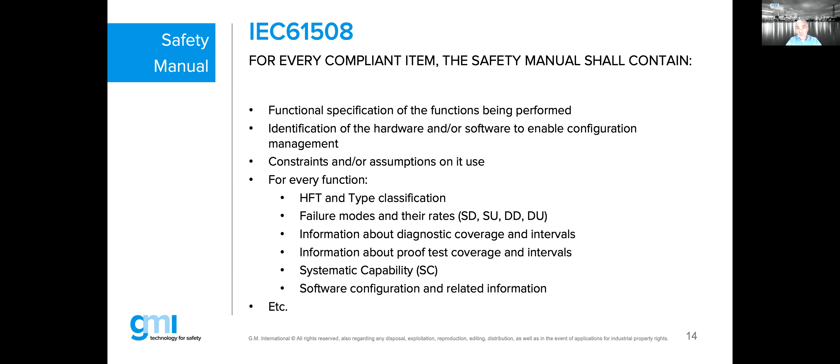Information about diagnostic coverage and the intervals, information about the proof test coverage and intervals, because every manufacturer has a certain reliability that comes out of their reliability calculation on the product, and they may tell you how frequently you have to test the system to a position that you know that the safety function is still working. Also items in there like systematic capability. Again, that's the quality of your design of your products, and the software configuration and the related information.

And to go specific now on one topic called the software compliant devices, or let's say the software firmware inside the subsystem, there's something very specific on the safety manual, because the safety manual in Annex D in part 3 of the 61508 is talking about the safety function integrity. That means the integrity of the safety function itself that is achieved by firmware functionality or software functionality. That means the functions, the constraints, and the evidence for every single element shall be precisely and completely described.

And I wonder how many of you have seen this in reality, that the safety manual of such a device is giving you specific information on what to take care of. That means things like the attributes of an element. You can have an element compliant device inside your subsystem; it shall be defined what the integrator shall consider during the application of hardware and/or software combined safety functions.

What I'm trying to say here is, there are some specific limitations and instructions coming in that type of section. You as an end user, when you're combining two instruments together, it doesn't necessarily mean when you buy two SIL 2 elements, let's say, that all of a sudden you can claim a higher SIL with that. That means you need to look for specific information towards the compliance of software related functions. Can I go into a higher SIL? Yes or no? Items like configuration, revisions, and backward compatibilities.

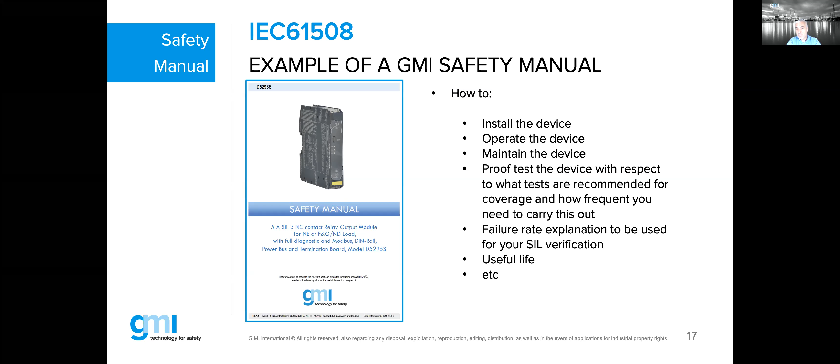But you may have a mechanical product in the field, depends on the amount of strokes of your valve, etc. So the useful life is very important to keep a record of, because you have the mission time on your loops versus your useful life. And I think I've got somewhere a slide where I give you some more information on that. I thought it was in here, but it's probably coming later.

So normative requirement, and I'm jumping now to another safety standard, which is called the IEC 61511, which is the application-specific standard for the process industry. And the process industry, I think I've got a slide with some more data. What is the process industry now including? Now, what is now normative required by the IEC 61511?

And for those who have read the IEC 61511, will see that in the definition of the abbreviation, which is in section 3 of the 61511 part 1, they call it functional safety manual next to safety manual. And there are unfortunately too many engineers still today in the year 2020, and the standard is out in Europe since 2016, in the US since 2018, that have no idea what a functional safety manual means, because this is not the same as the individual safety manual from the manufacturer. You may need the individual safety manual from the manufacturer, obviously, to get all your data together, but we are talking here about the functional safety manual of your safety instrumented system.

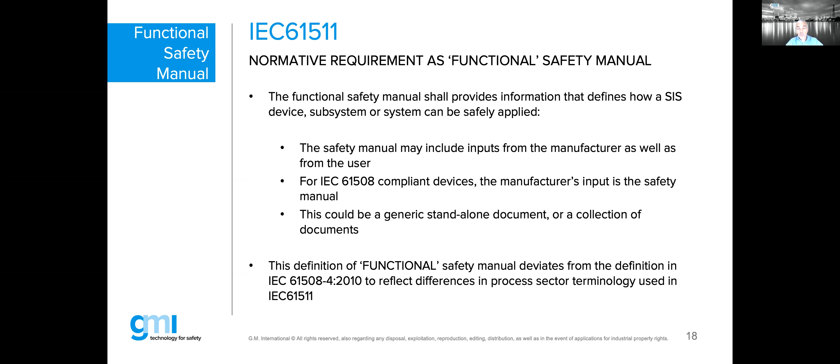So the safety manuals individually of subsystems will be an input coming from the manufacturers. For every compliant device, as I told you, normative required since 2010, you shall have a safety manual. And your functional safety manual from your 61511 could be a generic standalone document, which in reality it almost never is. It's a combination of all kinds of documentation. And my advice will be later on, the more documents you will have, the worse you will be able to keep a clear track and record of revision, etc. So in the ideal world, you have only one safety manual per safety instrumented system, but in reality, I'm afraid that's also not really achievable.

The word functional is trying to deviate from a definition from the 61508. So the 61511 talks about functional safety manual, whereas the 61508 talks about safety manual. So they skip that word functional. And the functional safety manual purpose, as I already told you, is a description customized per the way you have configured, the way you have designed your system. But the aim is to help, at the end of the day, the field engineer, the maintenance engineer, the operator engineer, or the end user to ensure that the systematic safety integrity will be maintained throughout the useful life and the mission time of that specific safety integrity level for that specific safety function. And the safety function, we still call this here, the second bullet, your safety instrumented function.

So in fact, it will be a customized document that the manufacturer of the components cannot make. It has to be made by the engineer or the department, or let's say the system integrator or the system manufacturer who combines those items together.

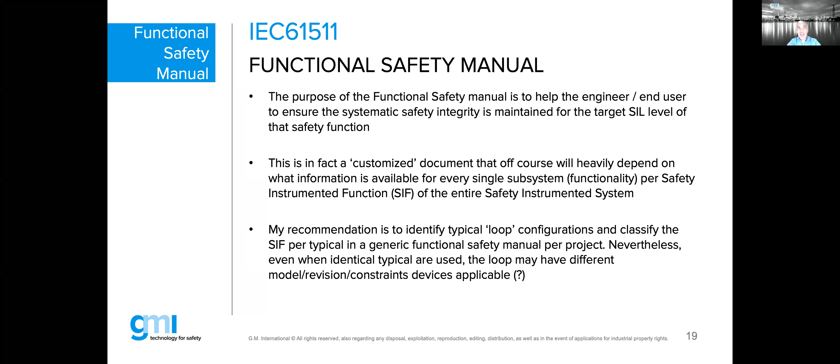I have done a functional safety manual for a project which was dedicated to an end user, and the end user had a specific unit where they had 1 out of 1 loops, 1 out of 2 loops, 2 out of 3 loops. So we described templates, typicals per type of loop. And then we made a matrix where, specific per loop, we have additional information, because every single loop can have different proof test intervals and safety data, because we have used maybe different material.

So we don't want to reinvent the same wheel every time for a 1 out of 2 loop. We made one dedicated, very detailed 1 out of 2 functional safety manual with a matrix linked to all specific safety loops. That is how we solved that for this one client.

I think we have lost you for the last 20 seconds. Okay. I just got a message that my connection was unstable. Am I back now? Yes. Now you're back. I look very pale in my face. It is because of all this lighting, and it's getting dark outside. So now all of a sudden, I look like I've got a white face. Well, I'm not as white as the picture looks. Anyway, I'm glad I'm back, and thank you, Mauro, for saying that.

So, coming back to this slide, I think I just opened that slide when maybe the connection was dropped. In the example of a SIF, you may have 55 different safety loops, and all the 55 different safety loops will go through the same heart of the system, which is the safety PLC. And through all those interposing relays from GMI, you may have used all the same type of GMI interposing relays. However, at the end, you may use 2 or 3 or 4 different vendor solutions

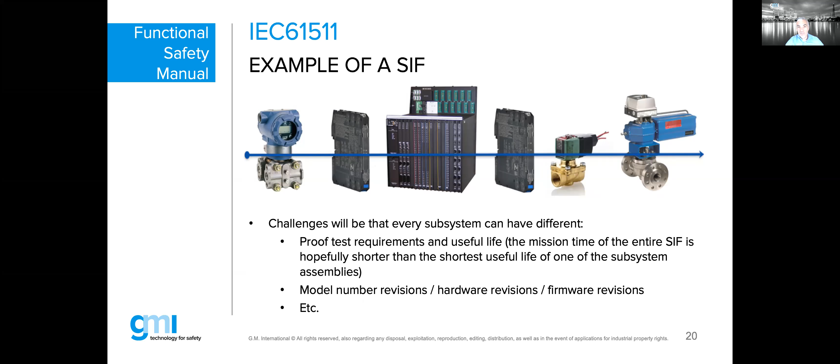So what we say here is that the mission time of the entire safety instrumented function needs to be, and hopefully this is correct, shorter than the shortest useful life of one of your subsystems or your assemblies in your safety loop. For every single safety loop, we also need to see the specific model revision number, and if applicable, the firmware revision number; that needs to be captured per subsystem in one safety instrumented function.

The purpose now of such content, and although I was trying to be brief, let me just go back. Although I was trying to be brief, it's still a lot of bullets, a lot of text, but I will try to capture this in a practical example. If you think about it, a functional safety manual for one of those safety instrumented functions will have to give a description. What is the purpose? What is the description of the functionality being performed, including all the details like the revisions of hardware and or software.

I am an instrument engineer myself, from the very early days, in the 80s. What we would usually go by would be a schematic. The safety manual would also be like a schematic together with a P&ID. We would actually have enough with that type of information to understand how the loop is working. However, we have to think about the future, that people who are taking that type of information may not be as skilled anymore as we used to be in the older days.

I don't think the people are more skilled today. And even looking at the picture, or the schematic, they may have a different opinion on what is actually the functionality. So those are items that need to be avoided, because the whole purpose of functional safety is to minimize human failure. So the better and the more detailed we can describe it, the better in the future, so that hopefully people will not make a human interpretation with a human mistake on the particular functionality.

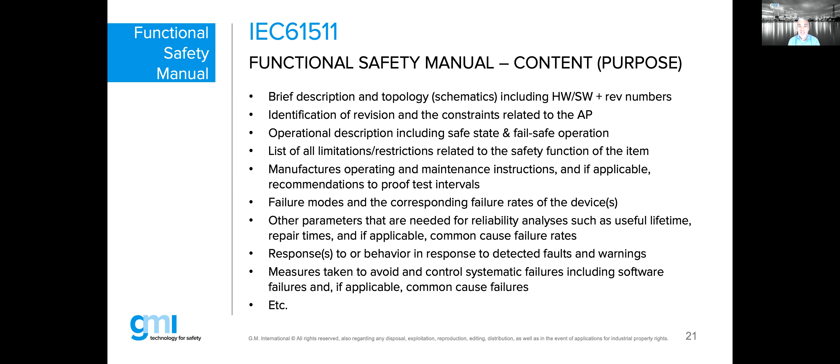Failure modes and the failure rates, because that will be needed by the person who will do the calculation. The response behavior in terms of when you are detecting some faults; some vendors will give you some time to go and repair it, depending on the redundancies, the configuration, etc. I will not go through all these bullets because I could probably spend an hour on here. I will jump to the poll question and Mauro will launch the second poll question.

Yes, I'm going to launch the second out of 3 poll questions. We will have a last one later on. Right. Okay. Can you see that? Yes, I can see that. In the meantime, I saw a question coming in. I was distracted with the question. Let's stay on the poll.

A project needs to comply with the IEC 61511 standard and is using only IEC 61508 compliant devices. That sounds like a very luxurious position, if that would be possible. So then the question is: answer A, you need a safety manual per device. B, you need a functional safety manual on your SIF level. Answer C is both A and B, and answer D is none of the above. So we were creative with none of the above again.

Maybe when you click these answers, you sometimes click too quickly, but when you read it again, the question is clearly saying you have a project that needs to comply with the 61511. So the first part of the sentence already immediately triggers my mind, because this poll question was made probably like 6, 7, 8 months ago. I don't even remember it myself, but when I read it now, it's clear. Well, the poll is finished, I think, Mauro, because I see that the majority already gave the answer.

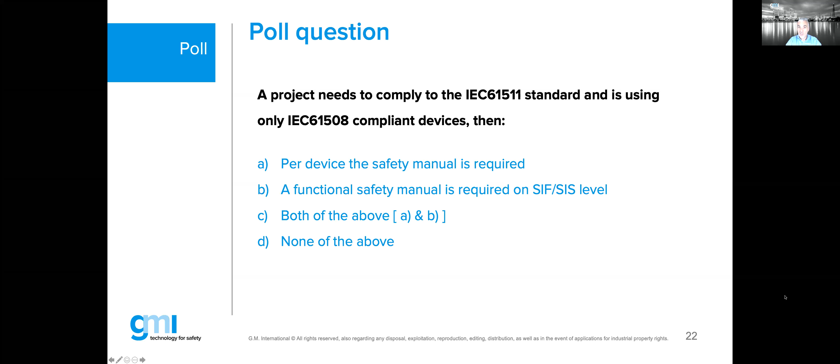Anyway, to finish my answer to this machinery directive or standard, I'm pretty sure that towards the machinery, there is a similar approach on the safety description and towards a safety manual. I'm pretty sure, but to be 100% sure, I should check the standard, which I cannot do now because I'm here in the webinar. So excuse me that I cannot give you a 100% answer on the machinery section, since this is not really my experience. Okay, Mauro, let me continue.

Well, the continuation is a summary. We have one more slide, and then we will go to the Q&A, looking at my clock. Okay. What can you take away from this 20-30 minutes talk on safety manual versus functional safety manual? Well, the content, although it is more or less the same, the functional safety manual can only be made by the people who are building, designing, configuring subsystems together.

You can never expect that a manufacturer, like for instance GMI, which is providing you with the barriers, the isolators, the power supplies, interposer relays, etc., can provide you with a safety manual for maybe your solenoid in the field you are using. And the solenoid manufacturer can never give you the safety manual for the interposer relay or the barrier that maybe GMI needs to give you.

So what I'm trying to explain to you, very simply, is think about when you are configuring and when you are combining all those system functionalities. The safety functionality needs to be described by the manufacturer, normatively required by 61508, in a safety manual that is compliant. That is a normative requirement for every compliant product since April 2010.

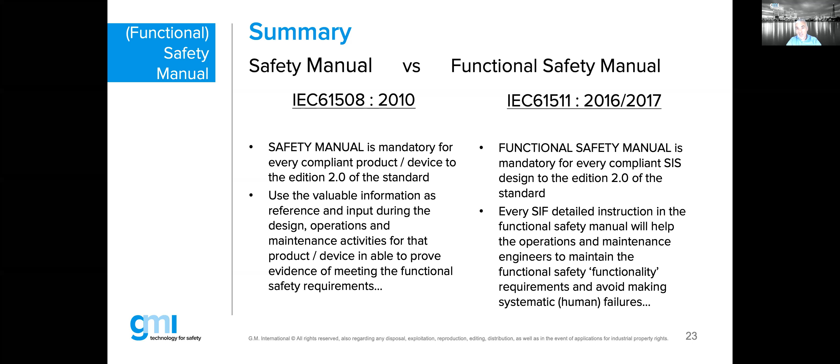And clearly in both the left column and the right column, there is valuable data, and the valuable data is in the safety manual for the manufacturers, that is for the designers of equipment or projects that are combining all these items together, but that information needs to be channeled, tunneled into a functional safety manual towards the end user. And to think about the end user, we have to think about how in the future the end user will maintain and operate the system in a functionally safe manner.

And with this, I'm closing my webinar here before we go to the Q&A.

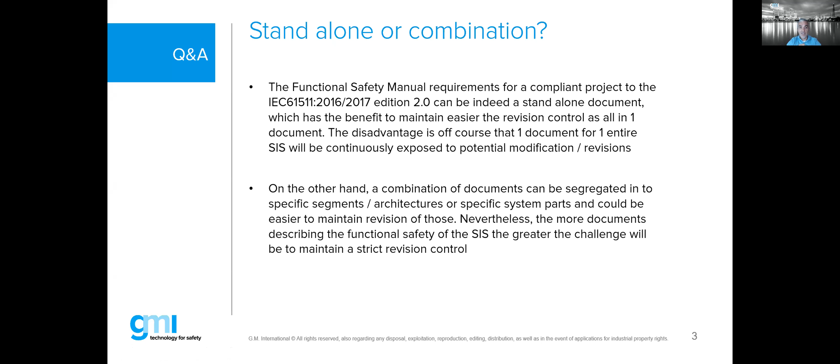So the more documents you have, the more it can be taken apart and have different revisions, and the more mess it will be to understand what document I have to read to have the complete picture. So short answer, try to use a smaller number of documents to explain the same story. The more the documents split the story, the more difficult they are to understand. Okay, Mauro, next question.

So next question is, please summarize key elements in the safety manual which are important to SIF. Yeah. What are the parts we should mention on a safety manual, and what are the main items that should be included in the safety manual? I do remember those were 3 individual people, but as the question is more or less the same, I thought let's lump them all together. So 3 questions, 3 people. I can be very short because we already explained it on the slides.

That means the content in the safety manual: the functions being described, your revision of hardware and software, the revision numbers themselves, the constraints and/or assumptions on how I have to use it. For every function there will be everything like your hardware fault tolerance, the classification, the failure rates, etc. Also the revision numbers of your hardware and software, already mentioned.

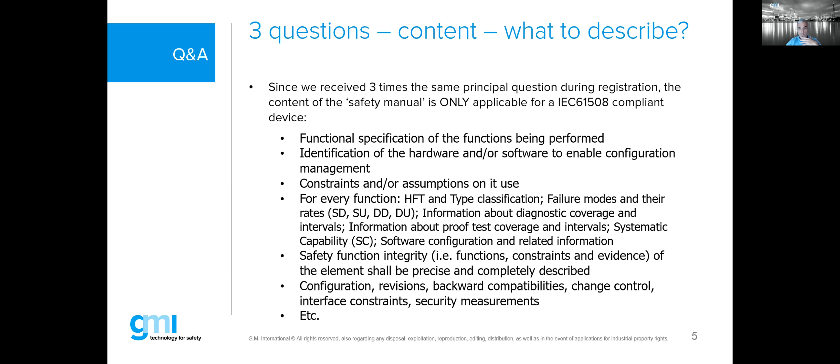Also the systematic capability, the safety function integrity, configuration with revisions, etc., and the backward compatibility for your hardware model or your software model. So all that has been explained. That is why we can be short on this slide. It's also in the webinar. Okay, Mauro.

Short question: IEC 61511 is the wrap-around of IEC 61508. Then why are they different from each other? Okay, thank you, Mauro. Well, we partially answered this in the Q&A with the machinery directive or machinery standard. The 61508, we call this the parent, the umbrella. That's where all the key issues are described on how to design functional safety. And the definition is spelled out in the title of the standard.

If you want to achieve functional safety with an electrical, electronic or programmable electronic safety-related system, that's what the 61508 has been made for. That means if I'm designing an element with some electrical component, some electronics, or I can program it, then I am supposed to follow the 61508 when I state that my equipment is compliant to the functional safety standard 61508. And normatively required here is the safety manual, which has a good purpose to explain all these items.

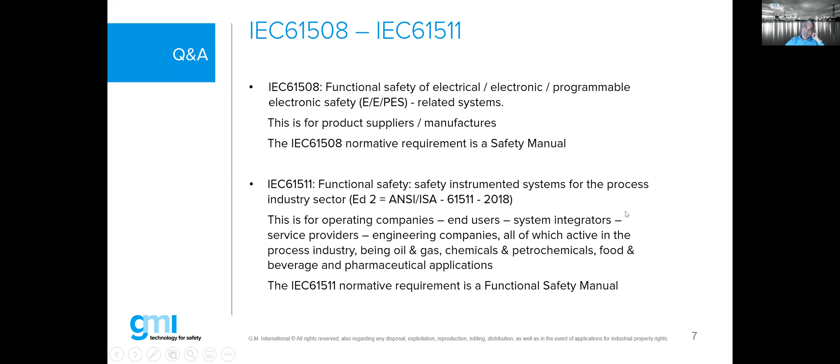But before the operating engineering can use such a document, someone will have to make it. And it's not the vendors here, it has to be the engineering companies, because they are building those types of systems. Yes, Mauro. Let's go for the next, and this is the last question. Somebody is interested to know the difference between normative reference and product safety manual.

Okay. Do you still hear me, Mauro? Because I just got a pop-up message that my internet was losing some performance. I lost you for a few seconds. Do you still hear me now? Now you are back, and yes, absolutely. Okay, good. Let's finish this slide because it's the last one before my internet drops. I don't know why. It's probably evening and too many people are starting to surf now.

Normative reference and product safety manual. Well, that was answered several times, but I will do it one more time. For every single 61508 compliant device, and again, not certified device, compliant device, that manufacturer shall provide you with a safety manual, because that's a normative mandatory requirement from the IEC standard. Nothing more, nothing less. The safety manual itself is clearly a requirement.

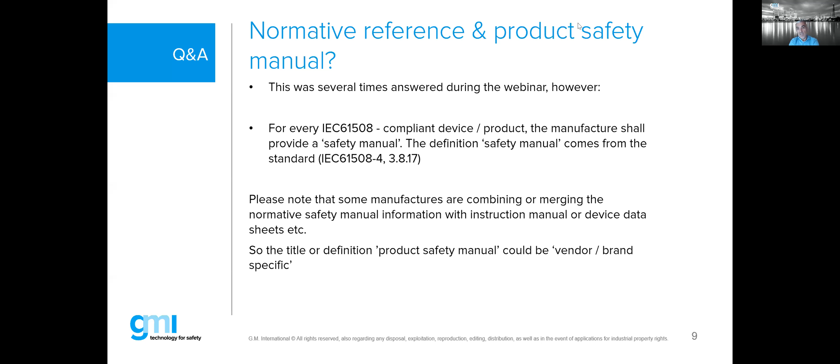My advice to you would be: any product that you purchased after April 2010 that is supplied to you without a safety manual, I would go straight back to the manufacturer and ask, where is the safety manual? If it's supplied after April 2010, there is no way you can prove your compliance without that safety manual. So the safety manual is an absolute must with your compliant devices. Okay, Mauro, thank you.